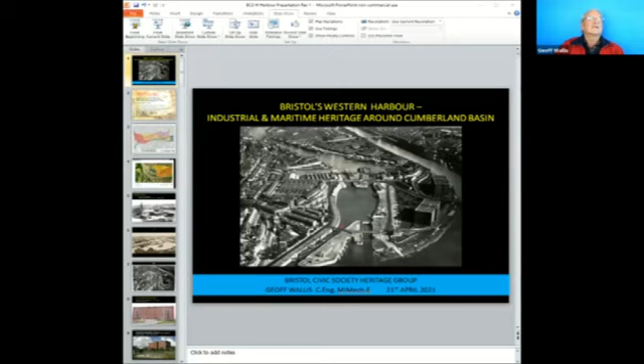I started off life in the aircraft industry as an apprentice, but I started working as a volunteer on the Crofton pumping station engines up in Wiltshire, near Marlborough, and frankly it changed my life. I soon abandoned aircraft and joined a small company, which I actually ran for about 30 years, retired in 2008, and became a consultant. As you can see from the bottom half of my slide, retirement has proved somewhat elusive. I'm busier now than I was when I was running the company.

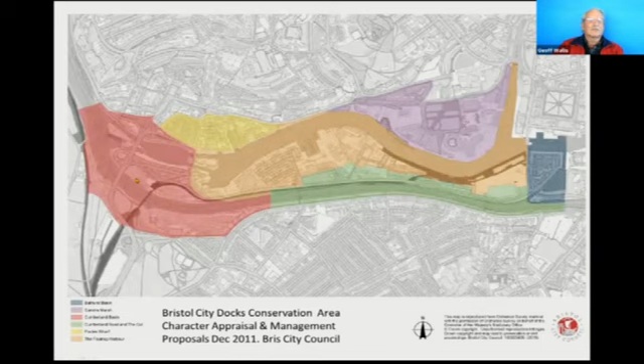So let me hasten on to explain the area we're going to be looking at tonight. This is the Bristol City Docks Conservation Area, and the area to the left in red is the one we're looking at, called Area 1. Most of the rest of this conservation area has now been developed, and that's why the planning authorities and the mayor are starting to think about this area to the west end of the harbour. It's the area where the former route of the river, now the floating harbour, joins the New Cut, and at the same point the main road going north-south across the city has to cross this area as well.

So it's a very interesting area where there's a lot of water, a lot of activity, and a lot of road traffic. This is not only a difficult area to plan the future of, but also to make any changes. But nevertheless, it has quite a lot of history in it, and a lot of heritage survives. Whilst you might not think it's very interesting initially, I hope within the next hour you're going to change your mind.

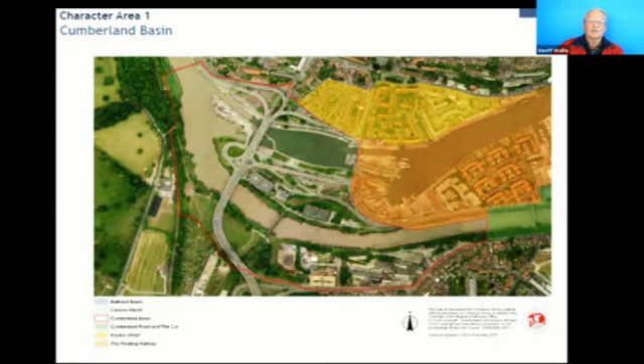Let's go back to the 1860s, where you can see to the left here, Jessop's Lock, and there's the junction lock there, which is also Jessop's Lock. That one survives, this one doesn't. But an improvement was made in the 1840s here by Brunel, who constructed this lock, and across it he put a swivelling bridge, with another bridge swivelling across Jessop's original lock. That's a rather wonderful photograph, isn't it?

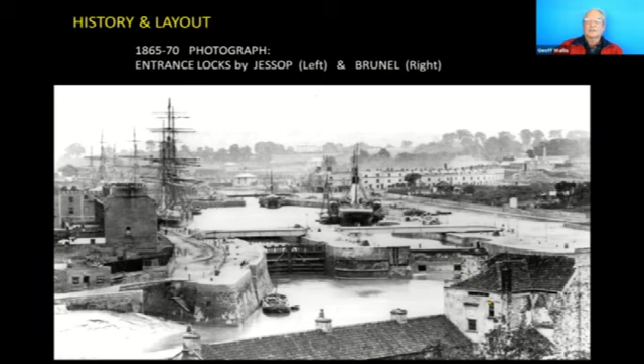You can imagine that if a ship of any decent size is coming out through here, it's got to turn very sharp to the right, or it's going to hit this bank. It's actually not very well aligned with the river. And so in the 1870s, the engineer of Bristol City at the time, Howard, created a lock that is much longer and wider, and also pointing down the river, as you can see.

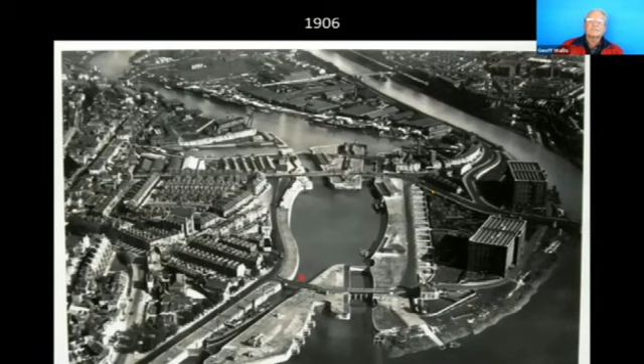This is Brunel's original lock, and this is where Howard's lock, Jessop's lock, was - that's been closed off now. You can see the swivel bridge here over Brunel's lock, and another swivel bridge here - this is Jessop's South Lock. That's now closed off, although there is a sluice in it to allow water to flow through. This is the 1873 junction lock with the bridge over it, a swivelling bridge here which survives. Brunel's Lock has been closed off here, and there's a dam there as well.

This bridge here was originally here - this is Brunel's swivel bridge that was over his lock, which has now been moved to the lock that Howard built in 1873. A replica of that bridge was built here, so this is called the replica bridge. Incidentally, notice the warehouses here with their sawtooth roofs - those roofs have changed now.

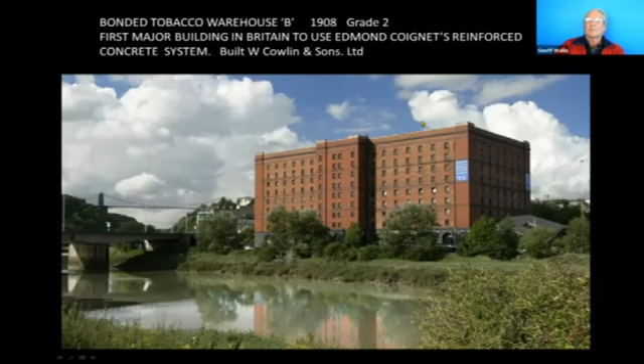This is Tobacco Bond Warehouse A, grade 2 listed from 1902, built by Cowlins. And this is B, 1908, similarly listed. This is important because it's the first major building in Britain to use Edmond Coignet's reinforced concrete. So it's brick clad, but the structure inside is reinforced concrete, again built by William Cowlins. And similar construction about 10 years later, also built by Cowlin, is C Warehouse.

This is the self-storage place at the moment. Of course, there were two more later bonded warehouses that have now gone.

I'm assuming everyone knows what a bonded warehouse is, but forgive me if you do. It's where tobacco came from the ship and was held in bond. A bale was taken out each day to go to the factory, and at that point, when it came out of bond, the tax became payable on it. So that's why these are very strong and secure structures.

So we're looking at the junction lock now, Jessop's junction lock, grade 2 listed, 1804 to 9. And you can see these recesses in the walls where the gates would have retreated into, and there's another pair of recesses there.

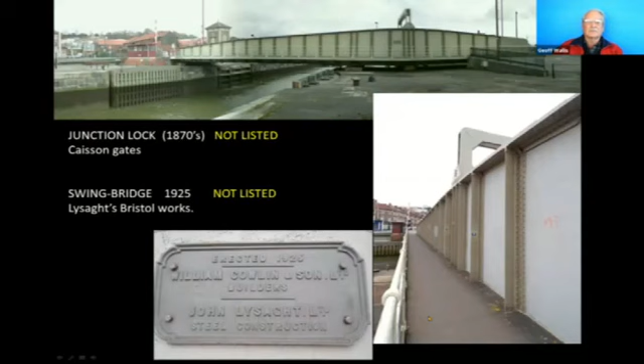Just to the left of this photograph, you're probably familiar with these rather wonderful dock workers' cottages from 1831, in rather good condition. And of course, the Junction Lock Bridge from the 1870s. This is not listed. In fact, none of the operational structures are listed.

If you go and have a look at this, and just on the side, you'll see this rather wonderful cast iron plaque. Again, William Cowlin's name on it as the builders, but Lysaghts made it. They had a factory just to the south side of the feeder canal. Nothing left of it there now except a slight recess on the side of the canal, which is where an arm of the feeder canal went in to feed the works. But this is a very famous and well-established Bristol manufacturer of steelwork.

A rather sad survival, this, I'm afraid. The Ashton Avenue swing bridge, built by Bristol City and the Great Western Railway, again by Lysaghts, designed by John English. And this was operated by Armstrong Whitworth's hydraulic machinery, of which more later. So it sits on a pedestal there, which has a series of rollers, and there's a weight at this end, and the whole thing swings around that center.

Now, this was the original appearance, absolutely beautiful. Look, there's a walkway along here, a gantry over the top, and a cabin, a control cabin, where there would have been a very good view of the railway and, of course, of the new cut. A shame that none of that survives now, but that was a rather wonderful looking bridge originally.

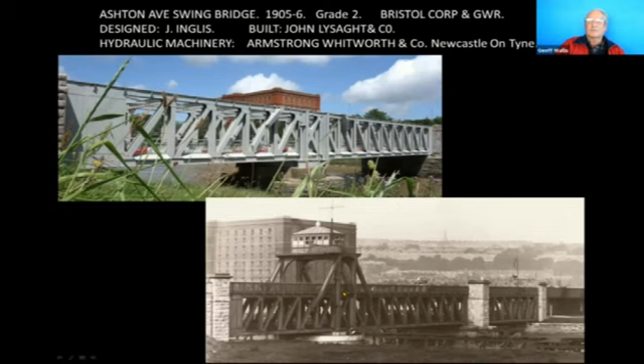If you're interested in this, just go and have a look at Thomas Ware's site, thomasware.co.uk. There's a video there of the process, and I'm just going to illustrate it briefly.

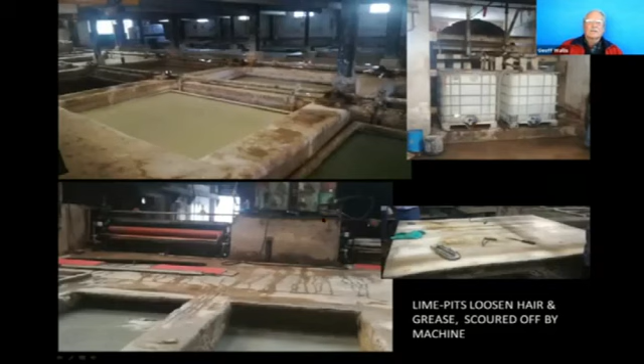If you go in, and I'd advise you not to do this at night, you'll find that there's a rather wonderful array of lime pits initially. This loosens the hair and the grease, and it's then scoured off by these machines and by manual processes. You can see on the table here, there's a caliper that is used to check the gauge or the thickness of the leather. And these are used to just pull the leather about. You whack that into the leather and pull, and the leather slides about. You see the chemicals here. It's all very traditional and still works very much as it did in Victorian times.

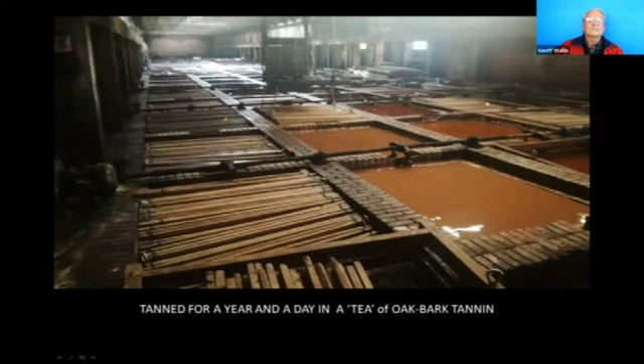And then it goes on for tanning. It's in these pits for a year and a day. Oak bark tanning, held on these frames here. And these things are mechanical stirrers. This just rocks back and forth and stirs the tea, as it were.

And this is the product going in or out. Andrew Brearley, the managing director here, very kindly showed a group of us from the Bristol Industrial Archaeology Society round about 3 years ago, and it was absolutely fascinating.

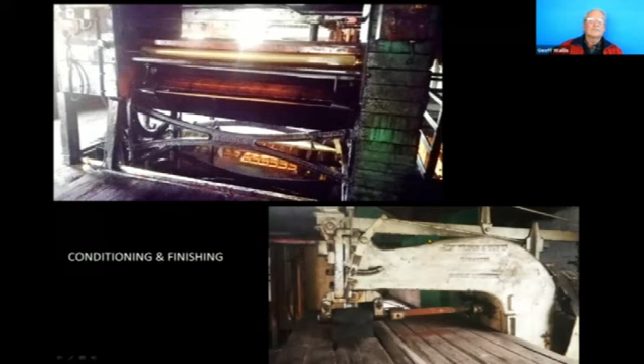I think there are two. All sorts of traditional machinery, historic machinery. As a mechanical engineer, of course, I find all this absolutely fascinating for finishing and rolling here. This is a wheeling machine made in Bootle and still in use.

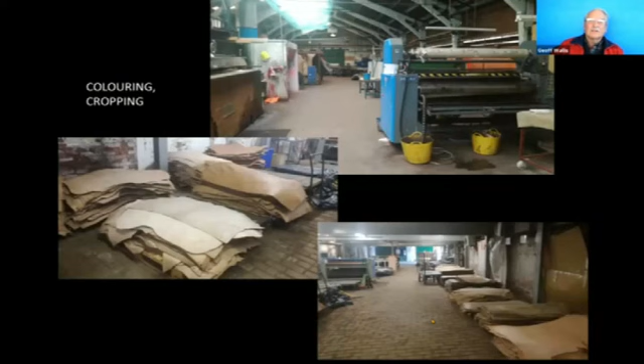Slightly more modern machines here. This is a process of colouring. There's a spray booth there. You'll notice a lot of the leather had a very high sheen and different colours on it. All done in this works here, where other finishing works are done. You can see there's a lot of work going on here.

This is a very successful business, and it's entirely due to the managing director. Hope he doesn't mind me saying that.

And then the final stage, one of the semi-finishing processes, is to stamp out shoe soles, as you can see here. These are all the different shapes that go under a pressing machine here. And so this has a sharp edge, which is pressed into the leather to make the soles of shoes and boots. High quality stuff. We're talking about hundreds of pounds for a pair of shoes, if not more.

And deservedly, they had the Queen's Award for Enterprise in 2018. This is the final product, and this was our host. And thank you, and Alistair, if you're listening.

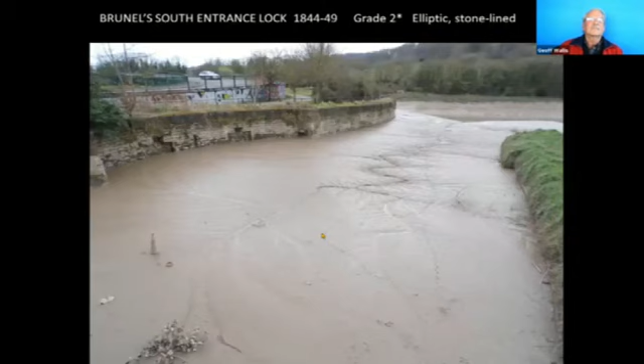Now we've moved down a little bit further to the west, and this is the end of Brunel's Lock. We're looking westwards, and again, you can see recesses where the lock gate would have swung across here. So you need to imagine that 30 foot, that's about 9 meters of silt, doesn't exist. So we're looking into an elliptic shaped basin here, and there would have been a lock gate, a very substantial one.

Hanging on that peg. Can you see that hinge there? There's another one about 20 feet down, and the caisson gate, as it's called, would have hung on that, and when open, the paddle would have gone into those recesses there, and the whole gate fits into that enormous recess.

It was so heavy that actually it was floated. It was called a caisson. It was partially full of air, partially filled with air, so that it was neutral or slightly negative buoyancy. So it would actually open and close nicely.

I would love to know if somebody can tell me what it is. I think it may have had something to do with wartime, maybe provisions during the war for using this lock again if the later Howard's Lock was bombed. But I'd very much appreciate if somebody could tell me what this recess was constructed for along the north side of Brunel's Lock.

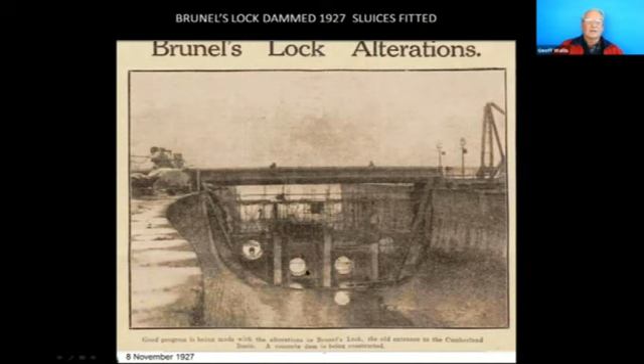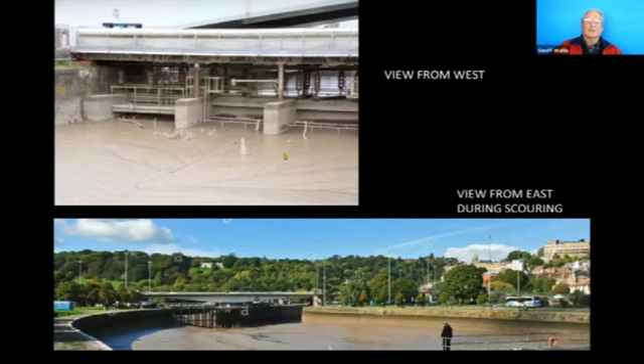So looking from the upstream side, where is it, oh, I can't see it now. Yes, there it is. The sluice gate is just there, and you can see that the whole thing is filled up to just a few feet below the normal water level.

This is during the scour. The water's been let out, so you can see it's full of mud. Just see the handrail there.

This is the scour actually taking place. By that I mean every couple of weeks the sluice gates are opened in Junction Lock. The lock gates, we're looking downriver now, in Howard's Lock, the new entrance lock, are opened, and the water is allowed to just flow through to wash out the silt.

You can see it's not very deep in Cumberland Basin, but we're looking here at Brunel's Lock, the intake. There's a later walkway in front of us, and it's completely silted right up now, although I'm assured by the assistant dock engineer that if that sluice gate was refurbished and got working, this would very soon clear its own way through.

The mud would gradually wash away. It would take some while, but it would just do it for free of charge, as it were.

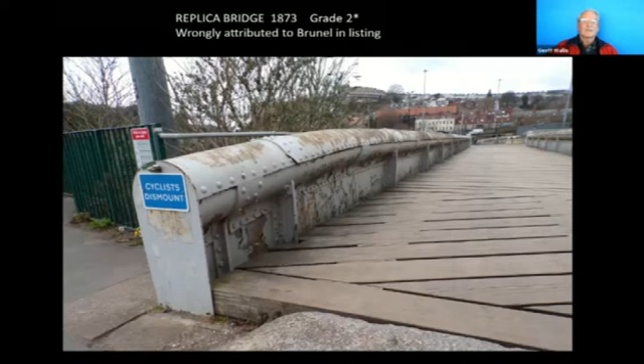So let's now go further down and have a look at this bridge, which is over Brunel's Lock. It's a replica of Brunel's Swivel Bridge, which we'll see in a minute.

Again, this is grade 2 star listed. It's wrongly attributed to Brunel. There were actually 3 bridges of this design in Bristol, and it's all been very confusing for the historians. But this has now been established by David Greenfield, the historian engineer, to have been the replica of Brunel's Bridge, although this was, I believe, a swing bridge as well.

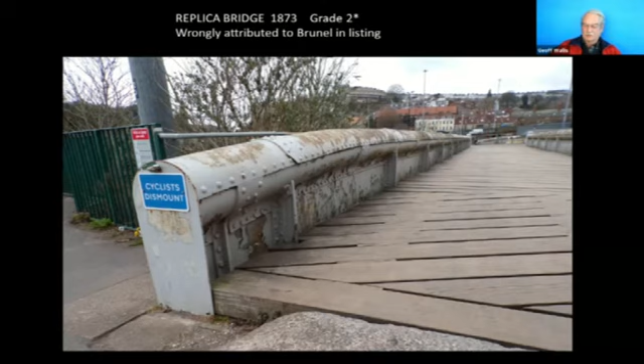So that's now static, of course, and is propped up on the dam that is built across Brunel's Lock.

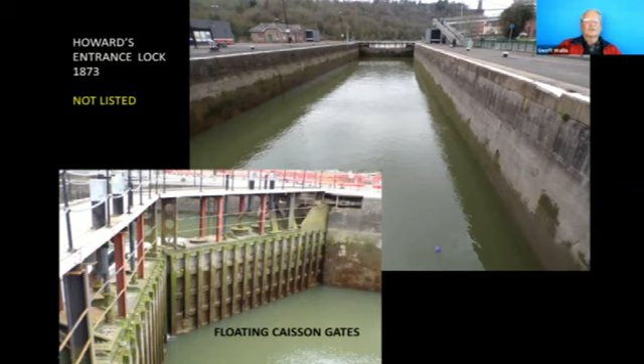We've now gone across to the north to have a look at Howard's entrance lock, which again has these floating or semi-floating caisson gates. Again, not listed, this structure, but a very fine construction nevertheless.

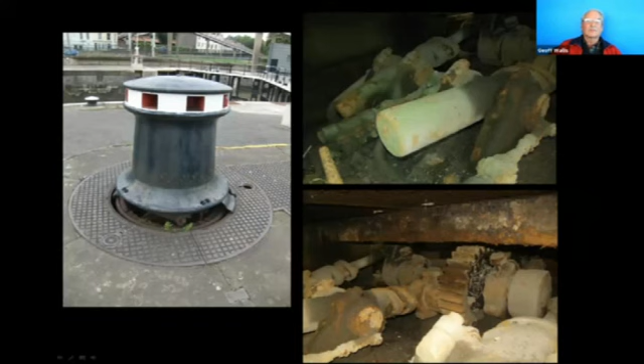And these are the 1870s dock buildings at the entrance. Notice lots of mooring bollards, a whole series of those, which are rather wonderful, and some capstans, which you can operate by putting a bar into there, or a whole series of bars, and have a series of men pushing this round.

This is actually a newfangled capstan, which is powered by hydraulic pressure. If you take up that grill, that cast iron grating there, and have a look underneath, you'll find there's lots of rather interesting machinery.

And this is actually a three-cylinder engine. There's the crankshaft driving that pinion, and that then drives the underside of this. So you admit water to these cylinders, and that came from Underfall Yard. You heard about that, I think, at the last webinar from Andy Blaney.

The pumps are still working down there. They provide, or they used to provide, 750 psi water to this end of the dock. And the mains are still there.

They're cast iron mains, and it is possible to turn the valves on at Underfall Yard. Last time that happened, there were rather exciting fountains in various places because the castings, I'm afraid, are no longer in particularly good condition. So the pipe is not serviceable, but this equipment is still complete.

And there are several sets. I think there are 5 sets of these powered capstans together with their machinery just hidden underground.

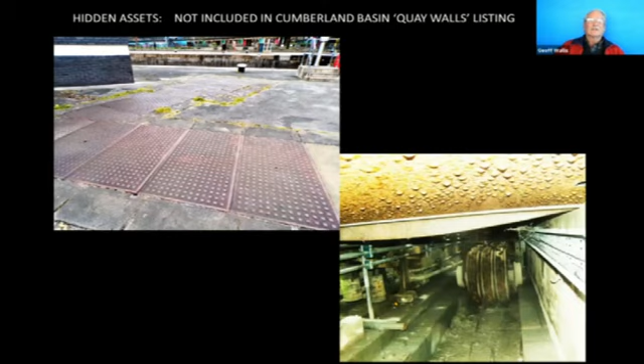Talking of underground, if you have a look at these gratings, you'll find that there's an awful lot of them, and you can start to see that they have a purpose. Underneath, there are ducts which carry the hydraulic mains, and then if you peer down underneath, you can see there's some more machinery, which is rather interesting.

And this is a thing called a hydraulic jigger. It probably would have been in there. I can't remember which one it was I photographed. I think it's not there now, but there are several of these still in existence.

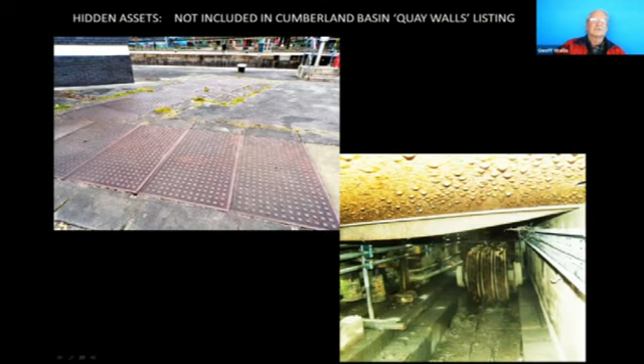And they used to operate the lock gate. So there was a chain from the lock gate coming to this hydraulic jigger, as it's called. So what we're looking at there is a series of pulleys.

One end of this chain would have been fixed, and then it goes round the pulley, back round another pulley, back round, and does that 3 times in this case, so that it multiplies the pull, the amount of chain that is pulled in. It reduces the actual force on that chain, but it increases the length that the chain is pulled. And this is the control mechanism here.

Again, there are several sets of this still in existence, and it's all extremely interesting. You can just see the big hydraulic ram underneath, which pushes this lot. The hydraulic ram pushes this yoke and these pulleys, in this case to the right, so that the chain is drawn around this series of pulleys and operates a paddle for letting the water out of the locks, or operating the lock gates themselves.

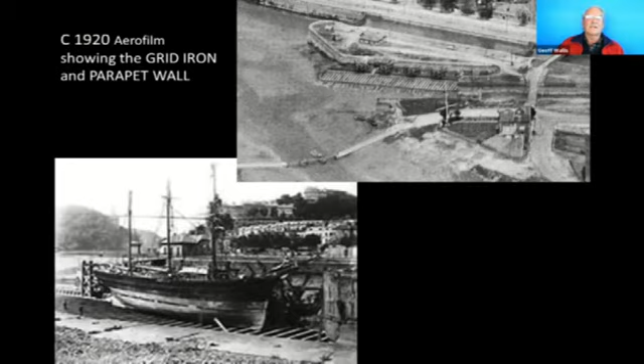It looks rather as if this might be major repair - look, there's a whole plank being renewed there, I think. So they would need to get that done before the next tide came in, or maybe they did it at very low, slack tides. And here, this is what it looks like now.

The gridiron is almost certainly still there - I have seen it. If this were washed out or allowed to clear by getting a flow of water through, the gridiron would come up again, and these timbers would need to be restored if it was felt worth it. But this is a really interesting piece of historic maritime structure that ought really be visible.

Let's move on now to Isambard Kingdom Brunel's Swivel Bridge, which was constructed just a few years after the SS Great Britain, in the same dockyard actually. This dates back to 1849. It's Brunel's first movable bridge, the only one to survive, and it has quite a lot of interesting and innovative features that he introduced.

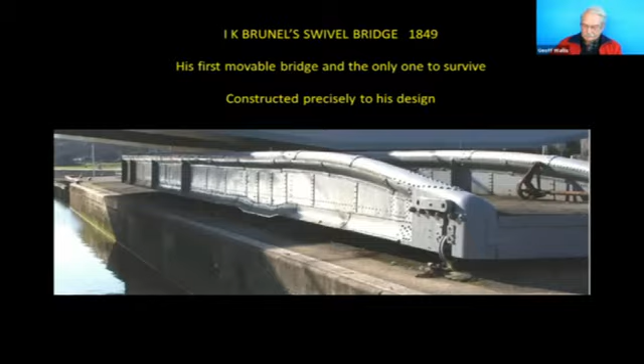As I go through this, you'll see these little clouds which illustrate these design features, these innovations. The bridge has two side members sitting on a very substantial wrought iron ring, and that itself sits on four wheels, so the whole thing pivots about this.

There's nothing supporting this end, so at the other end there has to be a considerable weight. This is a series of very large and heavy slabs of cast iron, and they're just supported a little bit by a track here, just to make sure this stays in alignment.

Now, can you see that these ribs or transoms slope one way here, then slope the other way, and then change again? That's a clever arrangement to make this internally braced, self-bracing. It can't rack, as it's called - racking is like this, or like that. So he's avoided having to put any cross bracing in by putting the ribs at an angle.

The downside is that these are fabricated from four angles and a plate, all riveted together, and they have to be bent before they're riveted together, then bent the other way. So this is quite a complicated design. It's very strong, but it doesn't actually save very much weight, because simple diagonal struts would do the job just as well. But he wanted this to be innovative, perfect, good engineering - and it is - but it must have been a pain to build.

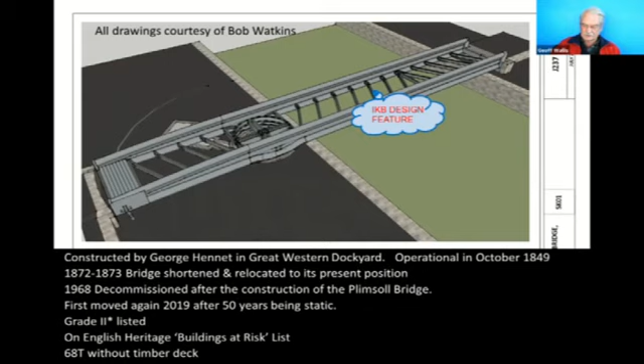One of the problems with iron—this is made of wrought iron, not steel, something earlier than steel. It's a handmade form of very pure iron, and it's quite flexible and rather springy. When it's something 70 foot long, it acts a bit like elastic, and it bounces about rather. So Brunel put in a couple of tie rods.

And these things were post-tensioned. What they did was jack up the nose end, the free end of the swivel bridge, whack in some wedges to tighten up these tie rods, and then let it relax. So now the tie rods are taking the weight, making it very stiff and very strong when it's not across the entrance lock. In other words, the unsupported end is trying to sag, but these tie rods are holding it up and making it very stiff.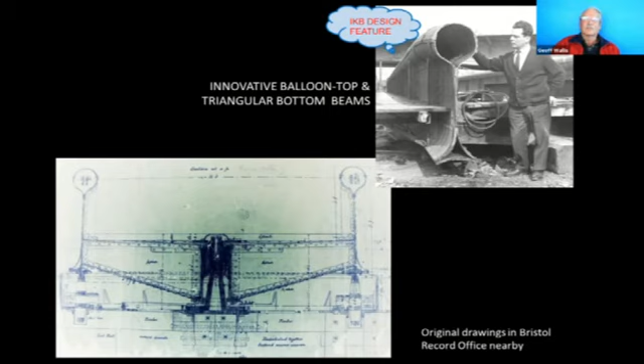Now that's important, because if you imagine the bridge closing across the entrance lock, it's got to come onto an abutment on the far side. And if it's sagged, it won't—it will just run into it. So this is all very carefully thought through and a very good piece of design.

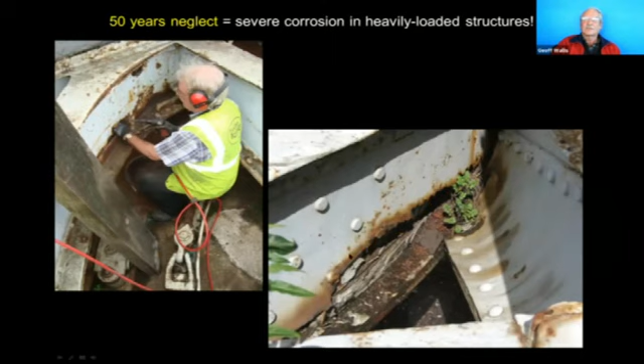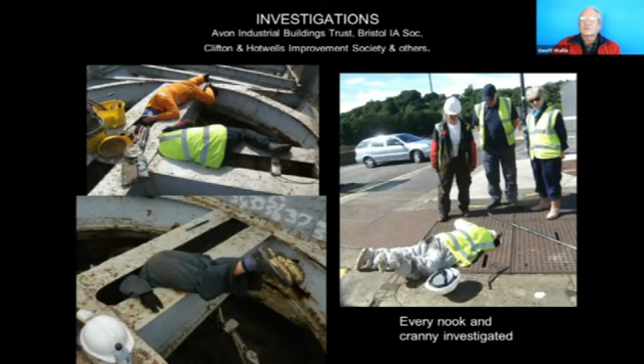So the first thing that we did, a volunteer group came together, sponsored by the Avon Industrial Buildings Trust, the Bristol Industrial Archaeology Society, the Clifton and Hotwells Improvement Society, and a number of others. Volunteers came out on their days off at the weekend and peered into everything, as you can see. Lots of photographs.

Historic England very kindly gave us a grant, so we were able to do a lot of other investigations, including surveying the drains. This is a borehole investigation to see what the soil is like here, because just over here—we're looking to the west, of course—you may recall that here is Howard's Lock, and that ran straight across the site.

I'm sorry, I meant Jessop's Lock, didn't I? That ran straight across the site. So we suspected this might be fill. And sure enough, down to 10 meters where it hits sandstone, it is all fill. This is just settled alluvium.

But the bridge itself is on very substantial timber bearers, and it seems to still be really quite stable—minimal settlement. So we're quite pleased with that. We know what's going on underground.

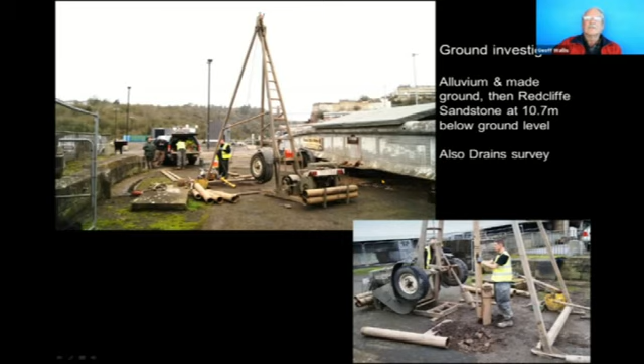The drains, on the other hand, which are important to keep the undercroft here—there's a pan underneath, about 18 inches deep, 400 to 500 millimeters, which fills up with water in flood. So there have to be drains, and they're not working.

Fortunately, we had one or two young helpers who could be got inside the small areas to help clean. A lot of debris and rust and stuff you don't want to hear about inside these boxes. And so that was all cleared out.

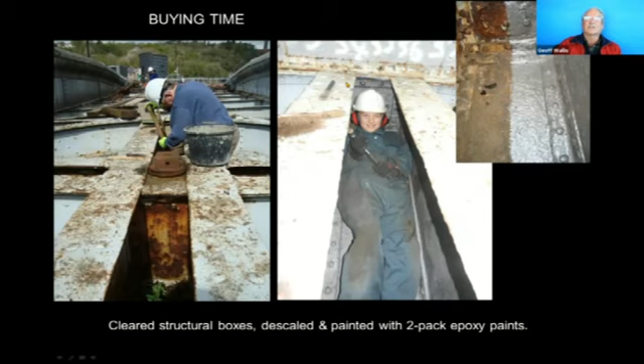As you can see here, we've started putting on 2-pack epoxy paint to just try and protect it a little bit. This will all have to come off again one day, but you can see more of our transparent metal here, as we call it. And this is in a primary structure, so we wanted to just keep that from rotting away.

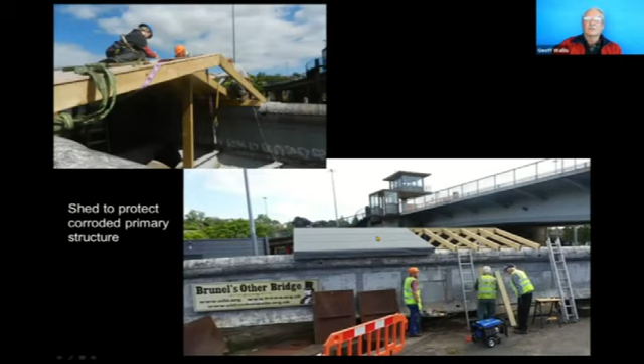So we put a roof over it and called it the chicken shed, designed and erected by volunteers, and still there. It gets vandalized occasionally, I'm afraid—we've had kids doing wheelies on their bicycles on the roof here, which is quite exciting for them, not for us.

Brunel developed an idea, which he tried out here, which was to have a big nut, a bolt really, on the top, which screwed down onto some bronze thrust pads. The idea is that you screw that down until it just picks up the load here. And the four wheels that I described, therefore, share the weight of the bridge with these pads.

Now, we thought, well, we better take all this lot out. We'll unscrew the nut, or the bolt, I'm not sure what you should call it really, I suppose a bolt, and just make sure these are all clean and in good condition. And then we'll lubricate them and put the bolt back in.

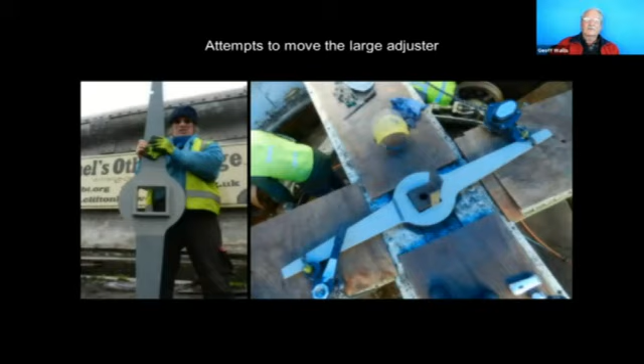We think that what happened was when this was moved to the present location in 1873, they must have discovered that this was not going to move, it couldn't be adjusted. And we discovered later that they simply left out these pads - there is no metal in there. So there is no way it could have been got out other than when they moved this bridge. So they didn't put those pads back in, probably because that component was seized up when they moved the bridge. In other words, it probably never worked ever since Brunel built it or had it built.

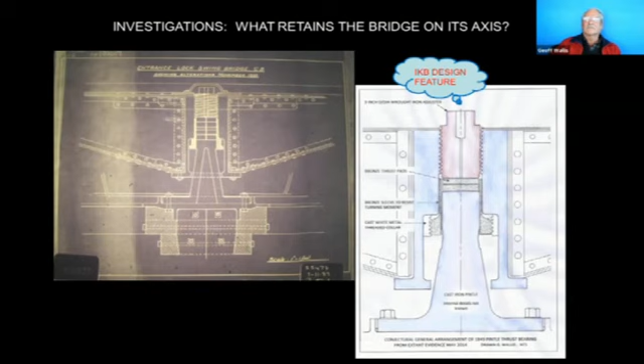And the reason is that this is a 10-inch diameter close fitting thread, and this has been in the water and it's rusted up. There's no chance whatever of this ever moving. So whilst that might have been a good idea of Brunel's, I'm afraid it was what I'd call optimistic, and I think probably failed fairly early in the service life of the bridge.

So this is looking up underneath. We raised the bridge about a foot, 300 mil or so, in the center. Here is the spindle - there's that bronze collar I was telling you about. And because we couldn't expect to use that again, it's very badly worn, we put another bronze collar in further down. I just put that in to show that I don't just give webinars, I do actually do practical work as well. And that ring was inserted inside this plate.

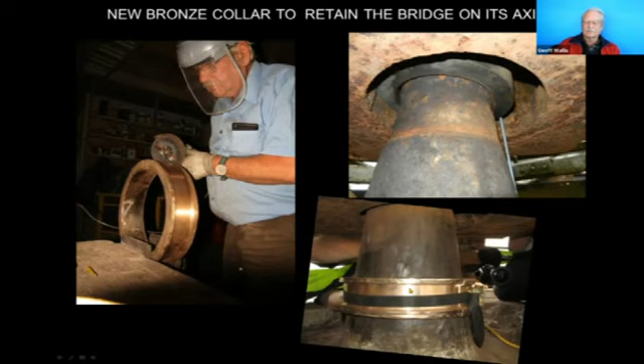The whole lot was then slid down back into its original position. So we've created a separate bearing of the same sort of design, bronze against iron, as was there originally. Hopefully that will now serve as a centralizing arrangement to keep the bridge running correctly.

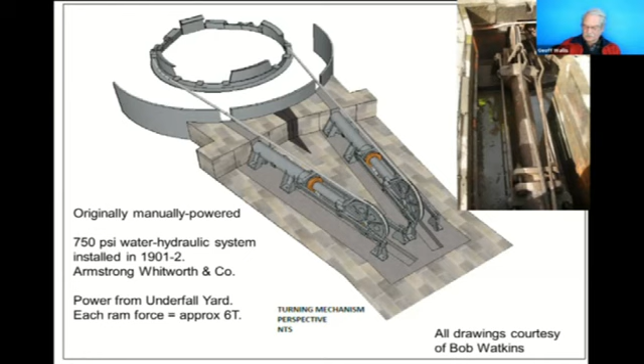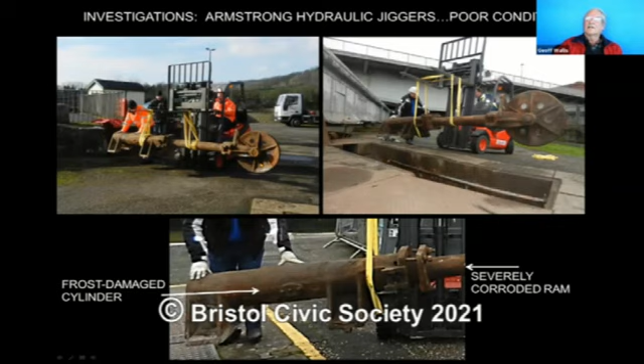So we took out one set of these hydraulic jiggers, sent them away and had them tested and looked at. I'm afraid they're not in very good condition. They're in a pit, as you can see here, and in cold weather the coldest place is down in the pit, so these things have frozen. Can you see there's a sort of seam along there? That is a repair. We didn't know that when we started, but it's cracked right the way along and been welded up.

Also, the rams here have rusted rather. These need to be machined clean. And if we were to do that, we would have to take so much metal off. We decided that was rather too intrusive.

I don't know whether you can see a pipe running along here. That is a gas pipe, and it has little holes in it. On a very cold night, they would turn on the gas, light these little lights, and the flares would keep this warm so that it didn't freeze. I hate to think what would happen if a series of these blew out and the pit filled up with gas, particularly if the other flares were on. I think it could have been quite exciting, but I don't know of any accidents.

I'd love to hear about them if anyone has come across any reports of strange explosions in the entrance lock area of Bristol Harbour.

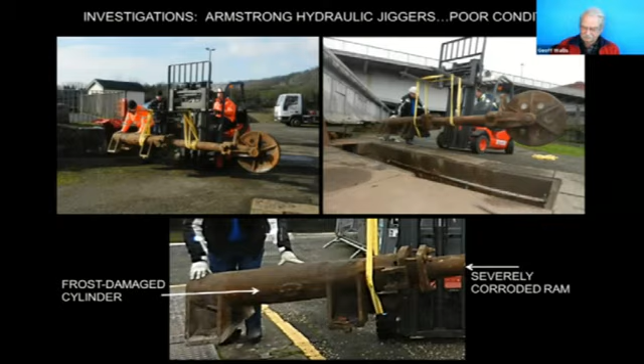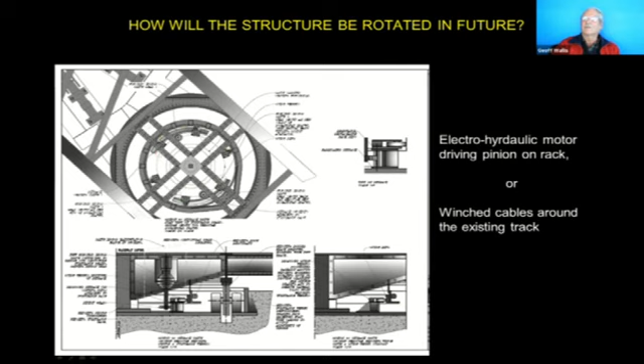So if we can't use those hydraulic rams, how could they be rotated? Well, we let a contract to some specialists. We had long discussions, and they confirmed that one of the ways of doing this, and there are several, is to simply drive it round with an electro-hydraulic system. There's a motor driving around underneath. There are all sorts of problems with this to do with loadings and so on, but I won't get into the mechanical engineering. So it's likely to either eventually be driven by something like this or winched around with cables. It could be refurbished in situ.

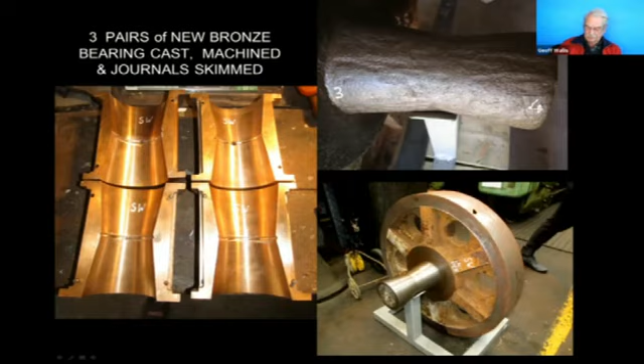You can see that the wheel has been skimmed flat, or cylindrical I should say. Here is the new one that's been made in Borough Foundry in Dudley. This is a wooden pattern, and the foundry are going to cast that in iron. There it is, and they've now put it up in that great big machine at the back to machine the wheel and the super bearings that go in there, exactly the same shape as we found.

And of course, the original is absolutely going to be retained. It's actually still on the site, and that will become part of the display. An original, but unfortunately this rim had worn so thin because of the scuffing that it was liable to collapse. So it's been retired, honourably, and a new one made of the right size.

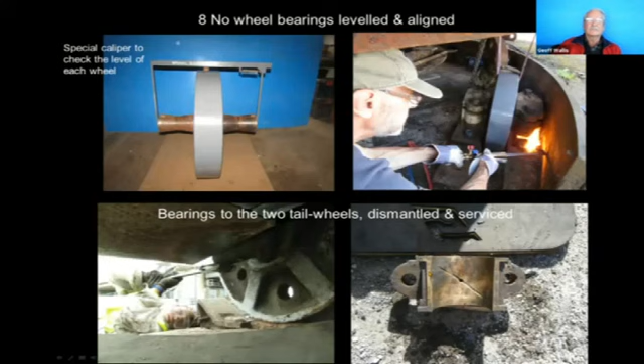Setting it all up was quite a complicated business. We had to make these special calipers which clip into the ends to set up the bearings.

This is the sort of work we have to do to free up the nuts. So this volunteer is heating up the nuts, as you can see, that hold this down, and then we can use a giant spanner to free them up. This is one of our lads undoing the nuts underneath the tail bearings. This is the cast iron weight I was telling you about at the back end of the bridge. He's not laying underneath that, don't worry, but he's using a giant spanner to undo the nuts.

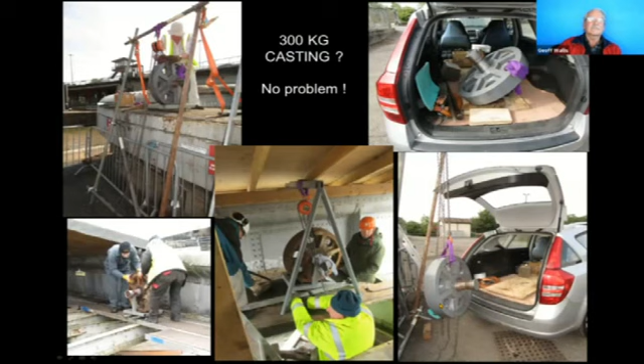Just to show you, this has all been done by volunteers, at weekends.

So if you have a casting weighing 300 kilograms, how do you get it there? Well, the answer is in the back of the car. Then you create a luffing arrangement here, sort of derrick, and you roll it out of the car, up onto the bridge, and then along a little trolley like this. There it goes, and then it's craned in using another scaffold arrangement into its final position. It sounds easy, and actually it is, as long as you've got the right equipment and you're well organized, you don't have too many people, you have one person in charge, it works very nicely.

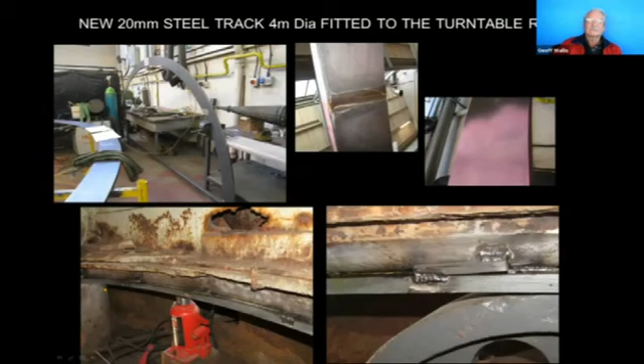Now, we're looking here, bottom left, at that primary structure. Do you remember the box section with the holes in it? Well, on the underside of that is a ring. There it is, it's a wonderful forging in iron, about 14 feet, just a bit less perhaps, in diameter. But the water, of course, has been running down here and dripping off the underside, and it was very, very rusty, very pitted. But of course, it is on that track that the wheel runs. So there is the track, and there is the wheel.

So we had to put a plate all the way round on it. Here is the plate being made, and that was then brought onto site in two halves, welded together. Here's the weld, which was then dressed off. This is a very strong structural element. So that's a crack detecting test here. We've done a test to see if there are any cracks, and you can see there's nothing there, there's no problem.

So that was then installed and welded in place with these little skew members here to allow this to just squeeze up to the underside here. So there's an aluminium gasket in there and some gunge, that's a technical term, to stop the water getting in. To allow that to squeeze up, we had this arrangement here, and that will ensure that not only is there good bedding all the way around, but the water can't get in. We don't want water to get in the future and start the rust again. Sorry if that all sounds a bit technical.

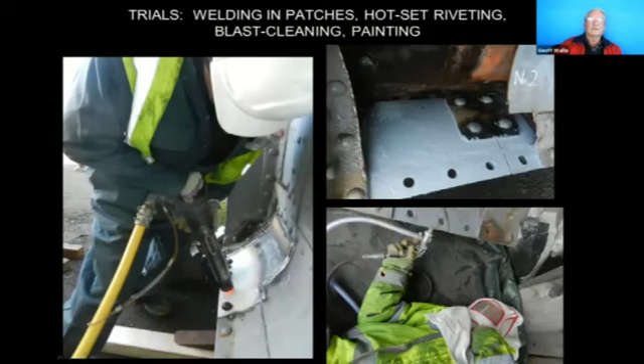A number of other trials were done as well. This is called hot set riveting. So we've put in a plate here, welded it round where there was a hole previously. This is to prove that a steel plate could be bent and fitted and welded to original wrought iron.

And then we've remade these welds, these rivets, by putting in white hot rivets, which are riveted down from above and from below. So somebody has to lay down underneath the bridge and hold up the white hot rivet as the riveter uses a piece of pneumatic equipment here to hammer down the head. It's very noisy, but you can see this is the final job, very, very neat. This is a new piece of plate on the underside, a new piece going up on up here as well. So this is to prove, firstly, the weld can be done between the steel and the wrought iron.

Secondly, that the rivets can be put in this location underneath the bridge in situ. Thirdly, that a sound job with good alignment can be done. Also, it was useful to know how long all this took, so that eventually a tenderer will be able to use our data to calculate how much time he needs to allow for each of these operations.

We also did some blast cleaning and tried different sorts of paint. So we've got a lot of data, and we now have a full, credible plan of restoration, which has been costed at something in excess of £1 million to restore the entire bridge in situ.

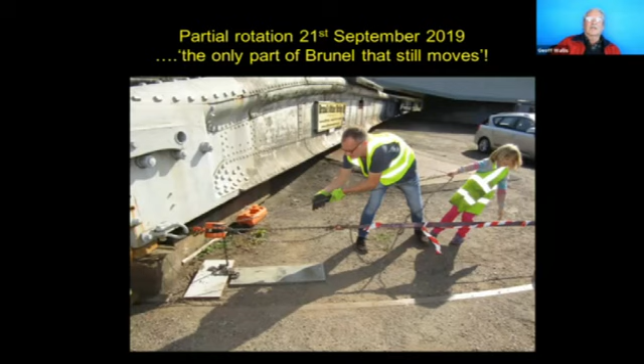Now we've been working towards trying to get this bridge to move, partly because we needed to know how much torque is necessary to make this structure turn. You can't finish the design of the drive mechanism until you know whether it's got to be 1 horsepower, 100 horsepower, or 1,000 horsepower.

And so we engaged a strong lad and a girl and set up a chain hoist and gave it a jolly good pull, after having done all that remedial work I was telling you about under the central support mechanism. And sure enough, it moved.

Now, we aren't allowed to turn a derelict structure across a working entrance lock, so it only moved a short distance, but we satisfied ourselves that it would move in both directions. And that was very satisfactory. So we now claim that we have the only part of Brunel that still moves.

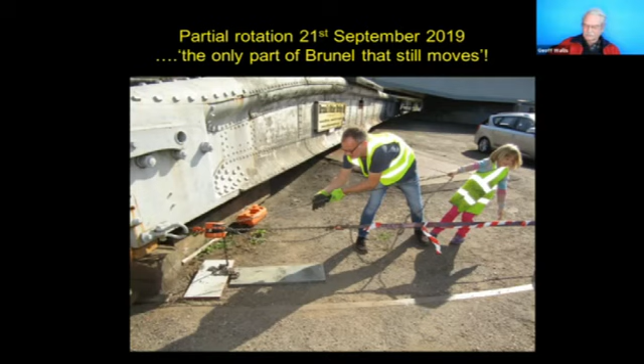Hope that's not a joke in bad taste.

What else have we been doing? Well, a structure like this doesn't look great. It's rusty. It did have trees growing through it. It has graffiti on the outside, and it's half hidden under another bridge. If we don't raise its profile, tell people about it, and get people excited about its history and potential, it will eventually just disappear from view. I don't just mean it'll rust away, it'll be scrapped. It nearly was once, and despite it being listed, things like this can be delisted and they can be disappeared.

So we've done as much as we can. We've invited people round on all the open days, doors open days that we can. We've had a conference by the Institution of Structural Engineers for the 170th birthday anniversary. We've had numerous interviews on the media. We've been in the Evening Post and so on. We've lectured to the ICE and to universities. We entertained Mayor George Ferguson, who was very supportive and said it's absolutely wonderful, I'll support you however I can, but no, don't ask me for any money. And we're trying to get increased social media coverage, which we haven't done successfully so far yet.

I mentioned the 170th anniversary. It was a great thing in September 2019. We even had Brunel come back and just check the bridge out.

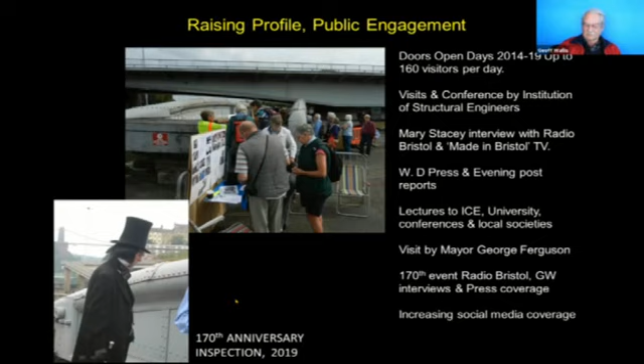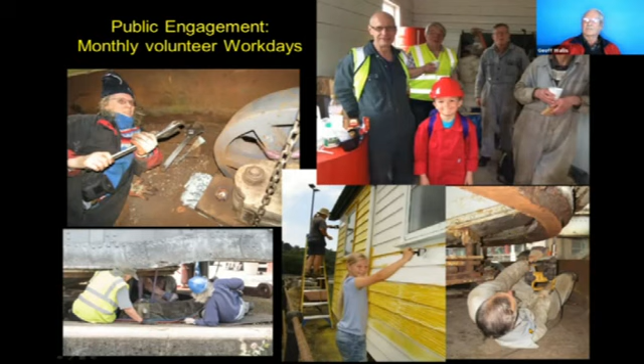Oh, this man is needle gunning the underside of that ring I was telling you about. So we're looking up underneath the turntable, as we called it, under the bridge. You can just see a wheel there. We've lifted the bridge up about 300 millimeters, and he's laying underneath, cleaning all this off. It will then be painted with several coats of paint, and then that ring I showed you will be squeezed up underneath and then tack welded on.

We've tried to encourage kids. About 5 years ago, do you remember Grommit spotting? Well, this lad was 11. His name was Charlie, and he went out with his father one Saturday afternoon to go Grommit spotting. He got as far as the bridge, and one of us was laying underneath, and he stopped and poked his head in and said, 'What are you doing?' And he said, 'Oh, well, we're trying to do a little bit of work on the bridge. Would you like a pair of overalls?' 'Oh, can I, Dad?'

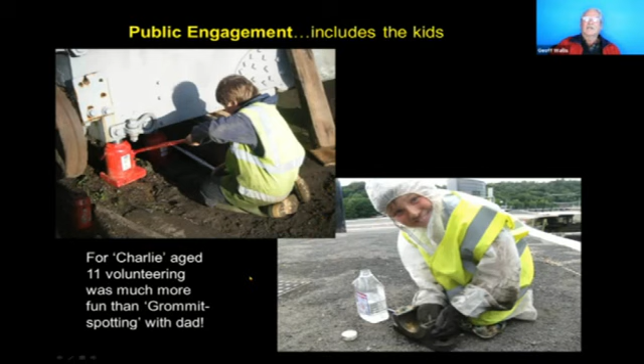And he's still working with us, actually. He's grown up now, but he has thoroughly enjoyed this work that he's done on the bridge. Here he is now, I think he's either 17 or 18. He's just moving on now to college. And he has grown up so much on this project and such capability that he now leads these projects.

Can you see this is how we're lowering in that wheel I was telling you about? We had to do it four times, of course. And Charlie, after he'd done the first one, we supervised him, of course, but let him get on and do the installation of the others.

This is Bailey. He was aged 8 when he started with us. And yes, we eventually got Charlie supervising Bailey, undoing those nuts and so forth. So this is real hands-on stuff. It's not as dangerous as it looks, don't worry. We haven't lost anybody yet, we don't plan to.

But I think this is one of the really, really important things about this project. It's hands-on, it's engaging the kids, it's something they'll never do at school or probably nowhere else either. I hope it's engaging them in mechanical engineering and in heritage and history, and certainly Bristol's history. So this is, I must move on. I get terribly enthusiastic about this.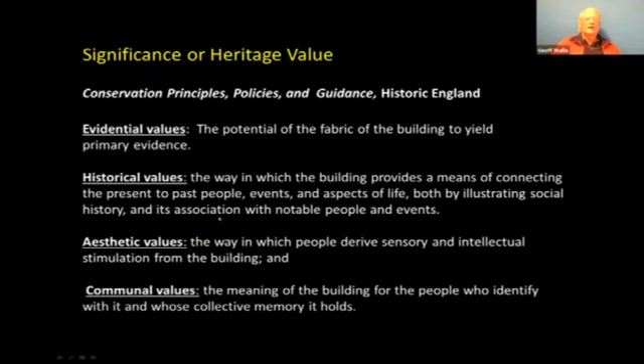Let's not go into that, but I think I can summarize this by saying that the Western Harbour assets provide evidence of commercial achievement, the investments and success of Bristol's investors, the venturers, the merchants, the ship owners, the captains, the traders, and of course of two South Bristol industries, the tobacco industry and Bedminster's once significant leather industry.

For an engineer like me, and I think a lot of others, the evidence of technological change is really interesting too. The increasing size of ships requiring larger locks and better aligned with the river, developing technology from stone to concrete, manual to hydraulic power, wrought iron and cast iron to steel, riveting to joining by welding, and those plain bearings we saw with iron running in bronze later became roller bearings. And we have evidence of all that.

And then, of course, the increasing road traffic requiring wider and stronger bridges. That's why we now have the Brunel Swivel Bridge underneath the Plimsoll Bridge. They had to use the same place because that's where the roads were approaching. And so we've got two stages of bridges there. And of course, the demise of rail traffic. That Ashton Avenue Bridge was a rail bridge.

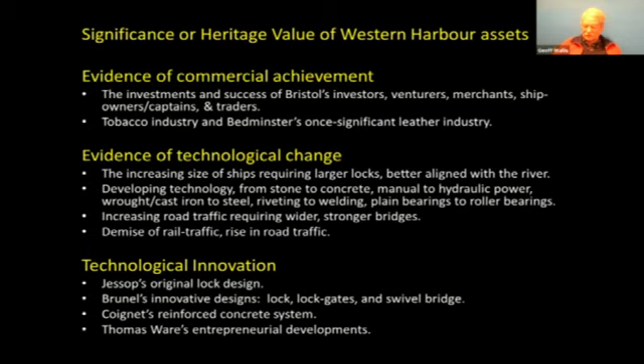Then the technological innovation, Jessop's original lock design and Brunel's innovative design of his gates and lock, and the swivel bridge, Coignet's system, of course, and Thomas Ware's entrepreneurial achievements. And then the sense of place. It is the gateway to Bristol's shipping, which is going in and out of the floating harbour. It's emblematic of our trade with the empire and the influence that we had on world trade.

This is important stuff, and it all focuses really around the entrance locks there, where the old route of the Avon and the New Cut and the floating harbour had to, of course, have all these major civil works to manage all that shipping and the land traffic that was integrated through the same area, whilst also controlling and dealing with the problems of floodwater and silt. It's a considerable civil and mechanical engineering problem dealing with all this in one place, and it's all there, and it goes through 200 years.

Absolutely amazing. And most importantly, it's the first and last point of contact for Bristol seafarers with their city. Now just think about that. I'd love to develop that, but I just lay in bed tonight and think about that. The first time and the last time you see the city as you go round that corner into the Avon is at Cumberland Basin.

And then it's a lung providing breathing space. It has mixed vistas, industrial, maritime, residential and countryside. Where else are you going to find that? There are not many places where you'll find that mix of industrial, maritime, residential and countryside.

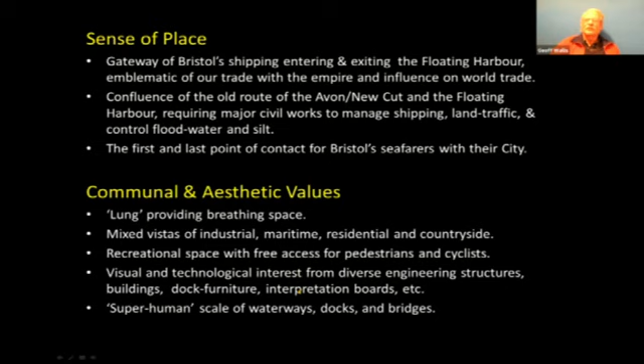It's a recreational space with free access. I could go on a long time about the diverse engineering structures and how they're so interesting, both visually and technologically, but I mustn't. Just the scale of it all, the superhuman scale of the waterways, the docks and the bridges, it's just big and impressive.

And I mentioned a couple of copies of this bridge. Well, here's one, and that's definitely an exact copy. It was constructed just 7 years after Brunel's bridge, and it's still over the Petrovski Canal at Kronstadt near St. Petersburg. Clearly a copy, and it's just been restored and it's still in use for road traffic.

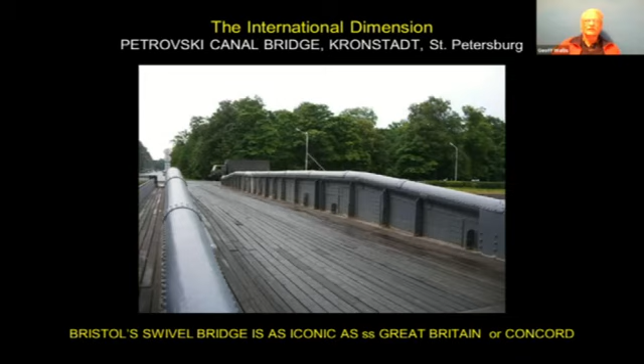Absolutely amazing. Can I suggest that that swivel bridge in Bristol is as iconic as the SS Great Britain or Concorde? I don't think I'm overstating that. It's been copied both in Bristol and around the world, and it was a very early pioneering development by Brunel, and we should be proud of it. Well, I'm proud of it. I hope you are too now.

Okay, just finally, let's have a quick look at the threats. Clearly, neglect causes decay in the different materials, damage from vegetation and silting. So it gets vandalized - we've got lots of graffiti there. The public lose interest in it, don't take any pride in it, don't use it as much as they would perhaps if it looked a little bit better. And as I said at the outset, the danger is eventually it gets lost because it just falls from view.

Ignorance and inaction - I'm not trying to get anybody here, but our city, of course, owns this bridge, and it is the responsibility of officers who are understaffed and overworked. A lot of interest has been coming from the amenity societies and heritage groups and so forth, but that's been somewhat stalled during COVID. And I have to say, again, I don't want to be unkind here, but they mostly have an aging membership, and one wonders what's going to happen in the future.

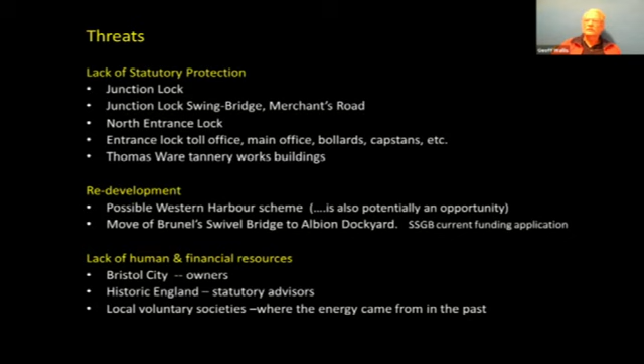Lack of statutory protection for the junction lock and its swing bridge, the north entrance lock, and the buildings and dock furniture around the entrance lock, and of course the tannery buildings at Thomas Ware. Redevelopment - let's not talk about the Western Harbour scheme at the moment, but I see that potentially as an opportunity, not only a threat. And I'll talk a little bit about moving the swivel bridge in a minute. And lack of human and financial resources - I'm afraid that's rather obvious and nothing much we can do about at the moment.

The SS Great Britain have currently got into the National Lottery Heritage Fund an application for about £10 million, part of which would be used to move the swivel bridge to Albion Dockyard here. This is the dockyard entrance, which has another caisson lock gate in it. And over there would be the swivel bridge - it would be sited here and swing across there, next to the Great Britain.

Now, there are advantages to this scheme in that if they get their grant funding, they will spend this money on restoring the bridge, which is great. And it won't be subject to flooding. Although, of course, there are discussions now about the new flood alleviation schemes in Bristol, which will eventually happen - otherwise we're all going to go underwater in the centre of the city. So there will be some alleviation schemes, but they're likely to be long term.

There will be certainty over maintenance. The SS Great Britain is a very responsible body when it comes to conserving historic structure. Of course, there will be increased visibility and footfall, and they do have a fundable scheme.

On the other side of the scales, the disadvantage is that the bridge will be taken out of its context. It was historically very much part of Brunel's and Howard's locks. The loss of a major heritage asset there could seriously affect the prospect of other assets in the area, because the evidence of the road crossing will be eradicated if the swivel bridge goes, and so there will be no reason to reinstate that low-level crossing if the bridge, and certainly its abutments, are lost.

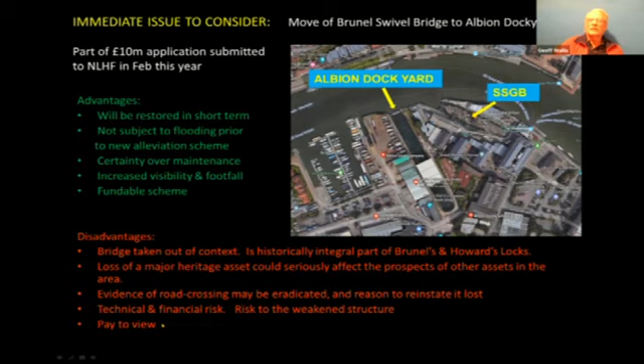It would be very expensive and difficult and perhaps rather risky to the structure to move it and to construct new foundations and restore and re-erect it. The other thing that concerns some people is that at the moment it's free to come and have a look at the bridge and walk around it, whereas if it's in a pay-to-view area, whilst it might be better maintained, it won't be free to visit.

So finally, ladies and gentlemen, the reason I'm excited about this whole scheme, the eventual development of this end of the city harbour, Area 1 as I described it, is because I can see there's a lot of opportunities for improvement and refurbishment and better use. I do think we can improve the road system. Whether or not we should have a new bridge across here is something I'm not going to get into now, but let's not close our minds to it if there are benefits. New housing and leisure uses from the development, I do believe that is possible. Obviously not too many houses, but I think we want to develop that area moderately, and that will certainly improve the appearance of the area.

I would hope that as collateral benefit from all this development, historic features will be restored and interpreted. As you can see, there is wonderful potential in all sorts of interesting historic features there. A scheme like this will hopefully get those restored and interpreted to the public, leading to much better use and increased care of those assets.

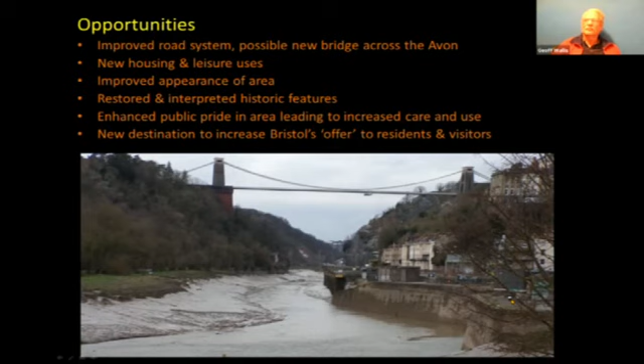Surely there's potential here. Look at that little area there on the right. The view from there is absolutely fantastic. Go and have a look at it sometime. Not right at the moment because it's roped off, but in about a month's time, hopefully.

So how can you help, folks? Well, why not join the Bristol Civic Society? They're taking this whole issue of development seriously. You're very welcome, especially if you're young. I'm allowed to say that.

This is your future. Come and join the Brunel Swivel Bridge Volunteer Day. The next one is on Saturday, May the 29th. We should be doing all sorts of interesting things. This guy, incidentally, is not painting graffiti, he's overpainting it. Why not arrange activities yourself? There's lots of work needs doing, maintenance and litter picking and all that sort of stuff.

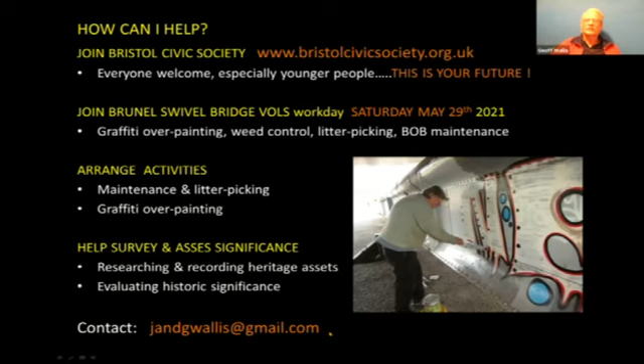We need to do more study on this area, to survey it, to record it, assess its significance and so forth. If you'd like to contact me, just jot this down quickly, my email address: jandgwallace@gmail.com. I'll guide you in the right direction or incorporate you into one of our work days.

So finally, just to show you that this is a live issue, this month Bristol City have invited architects to tender for a place-shaping vision to be prepared for the Western Harbour. So let's get involved now in it, folks. Now is the right time. Thank you, sorry, I've slightly overrun.

Wow, well, thanks very much, Geoff. Can you stop screen share and we can see people? Brilliant. Well, thank you very much, I thought it was a very great presentation. Judging by the comments on the chat, lots of people have really enjoyed that. I think you've done very well to get quite a lot of young people working on your bridge. I don't know what you're moaning about on that. But you're right at the end.

I do think the Western Harbour, whatever it's going to be, is both an opportunity and a threat, and there are lots of opportunities in there. One question I have, which has come up on the chat, is why the listing and protection of assets in the Western Harbour seems quite random, because lots of the things you showed us this evening aren't actually protected, are they?

Well, I need to be careful what I'm saying here, Simon. I don't know the answer, but what I've been told is that operational assets like the Cumberland Basin, the entrance lock and the junction lock, and the junction lock bridge and other operational assets are not listed because they would then require listed building consent to do any maintenance or major work to them. And I assume the council would be giving themselves consent. So I think there is some sort of planning agreement, probably for them not to be listed. But it seems to me this is something we ought to be finding out about.